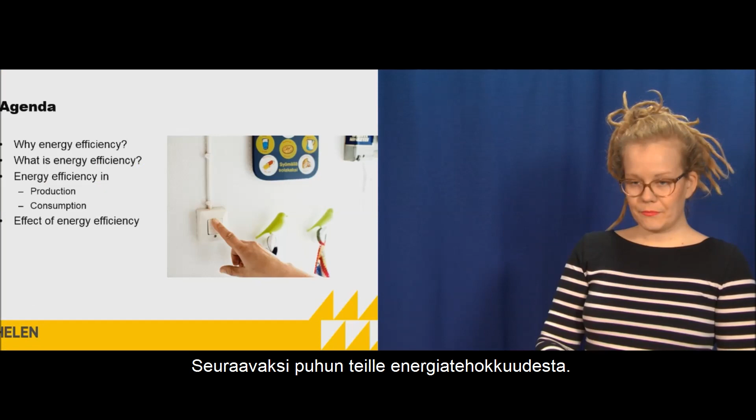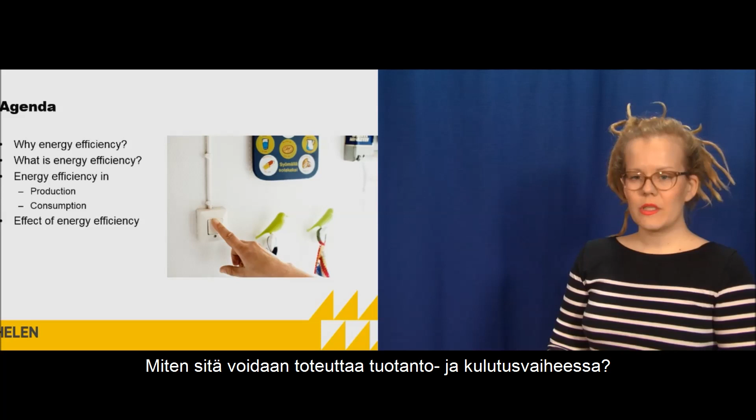So next I'll talk to you about energy efficiency. First, why we should do energy efficiency, then what it is in production and in consumption, and then in the end, what is the effect of energy efficiency.

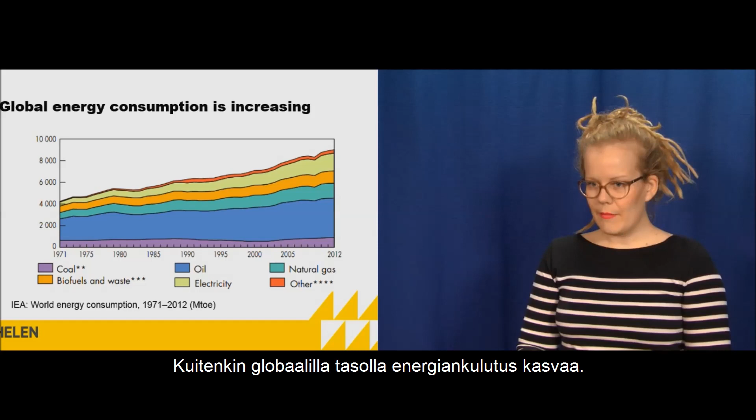So first, why efficient energy use is important. As you already might know, global energy consumption is increasing. And in all countries, it might not be increasing. In Europe, in Western countries, it's decreasing, but on a global level, it's increasing. And mainly, the use of fossil fuels dominates. That means that also global carbon dioxide emissions are increasing.

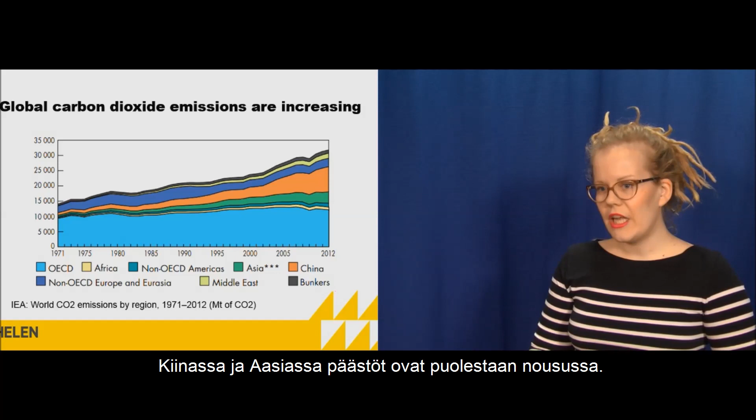And in this picture, you can see the share of different countries, and you see that in OECD countries, the consumption is leveling off. But for example, in China, in Asia, the carbon dioxide emissions are really increasing.

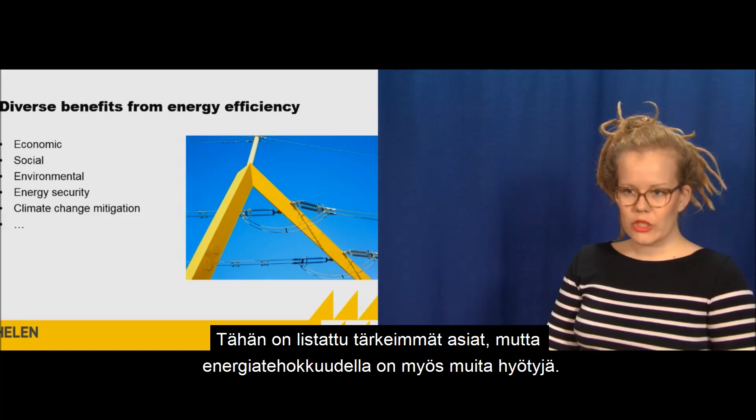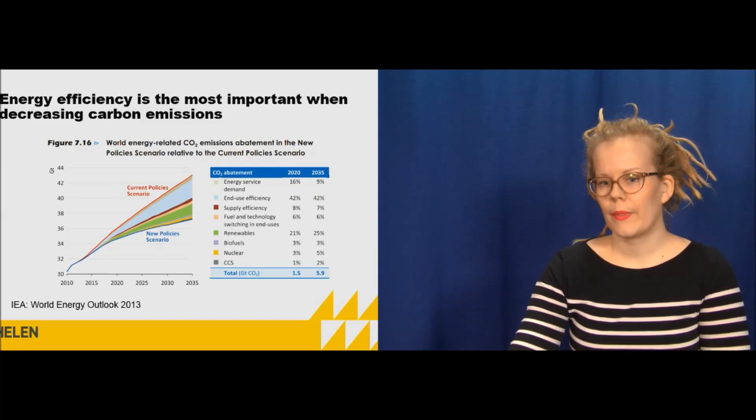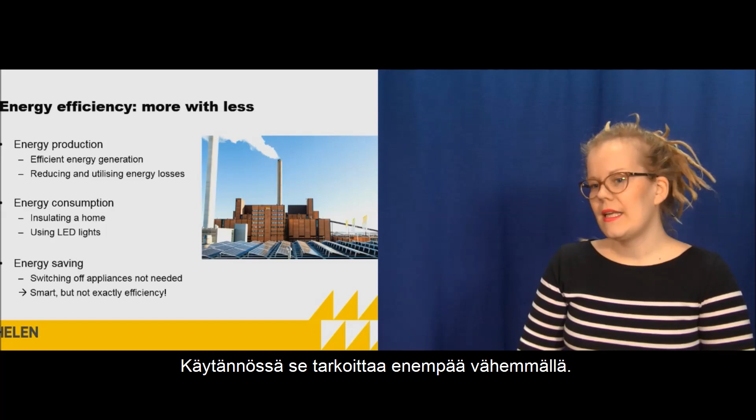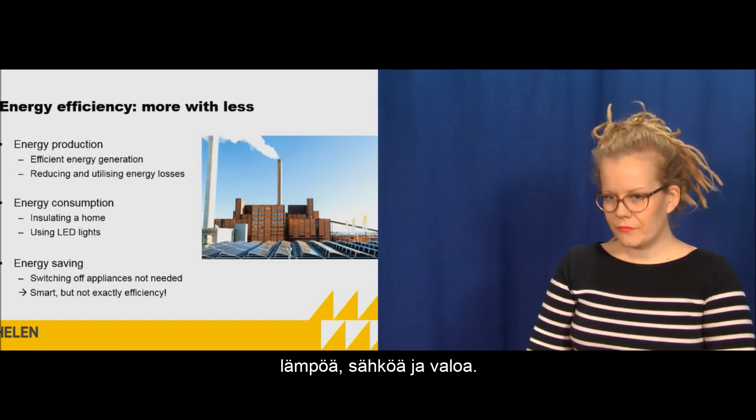Then a little bit about what energy efficiency really is and what it means. Basically, it means more with less. So we can have more services, we can have more heating or more electricity or more light at the house with less primary energy. So in energy production, it basically can mean more efficient energy generation and also reducing and

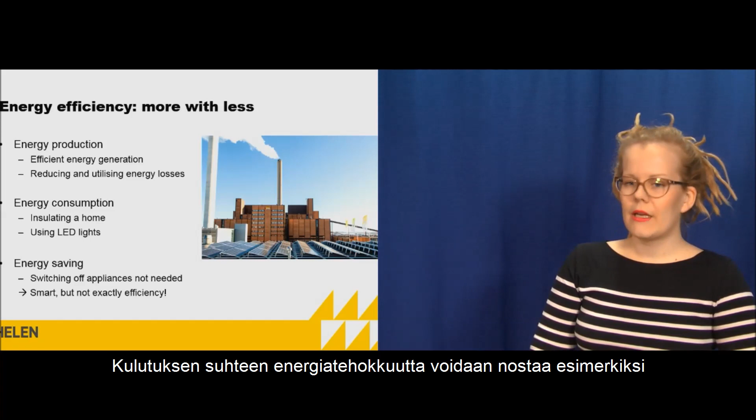utilizing energy losses. On the consumption side, for example, insulating a home so you don't need to heat that much. That's one option, or using LED lights, which consume less energy than traditional ones. Then energy saving is also a way to decrease energy consumption. But I see it as a little bit different than energy efficiency. Of course, you save energy when you switch off appliances that are not needed. It's smart, but it's not exactly efficiency.

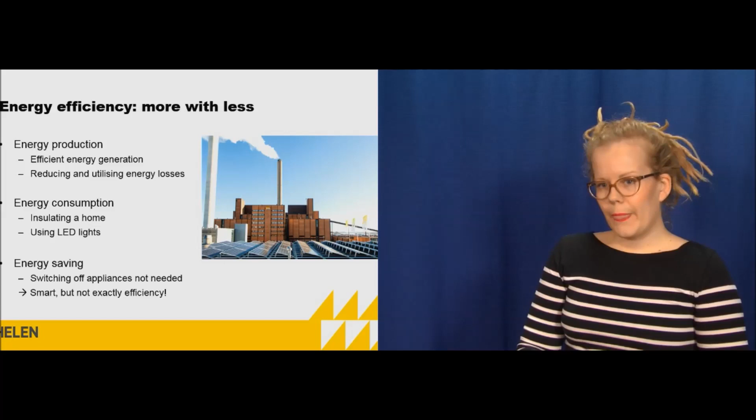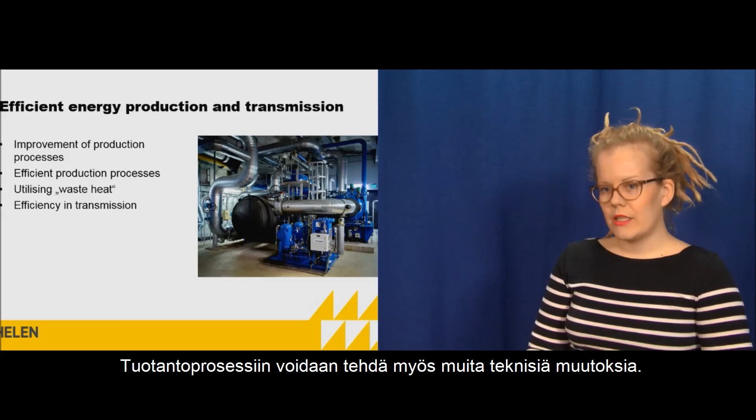Okay, so then we go to efficient energy production. In energy production and transmission, we can improve the efficiency in different ways. We can improve production processes, which can basically mean that we modify the turbines so that they produce more energy from the same amount of fuel, and also do a few more different technical changes to the processes.

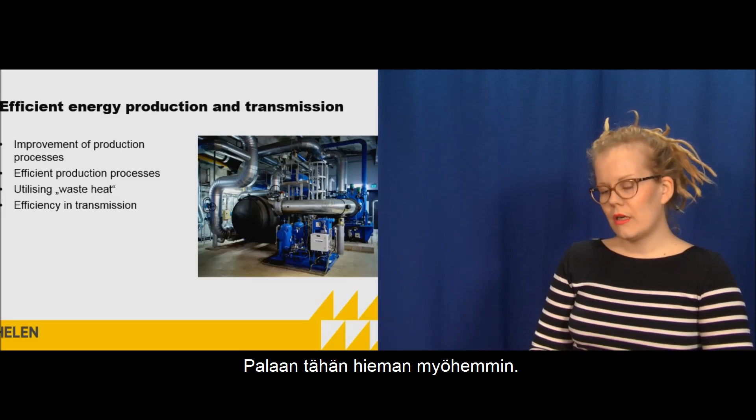Then we can use more efficient production processes, for example, combined heat and power production. I'll come to that a little bit later. Then we can utilize so-called waste heat, and then think about efficiency in transmission, so check that our power lines and heating and cooling transmission networks are efficient and we are not losing energy in them.

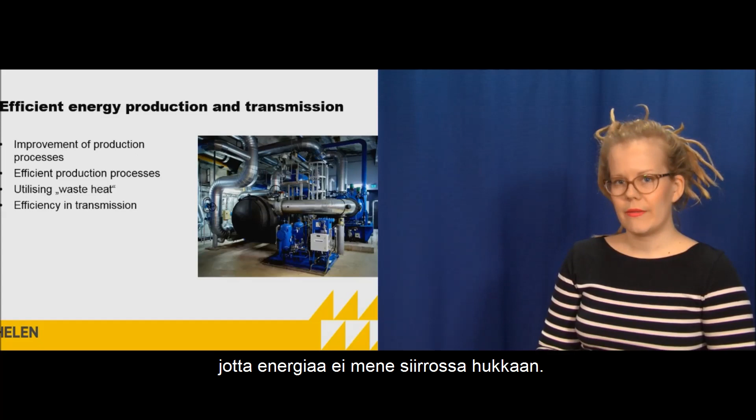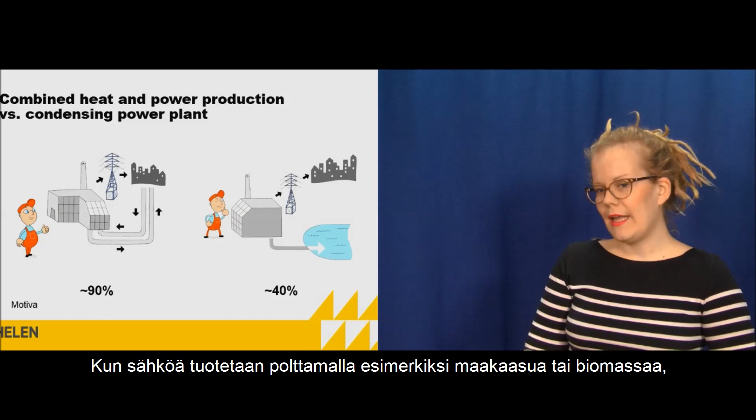So combined heat and power production basically means that when we make energy by burning something, we can burn coal, natural gas, biomass. We use turbines to make electricity. But when we burn something in order to produce electricity, there's always heat in the process. And then we can use the heat to heat up houses and other buildings.

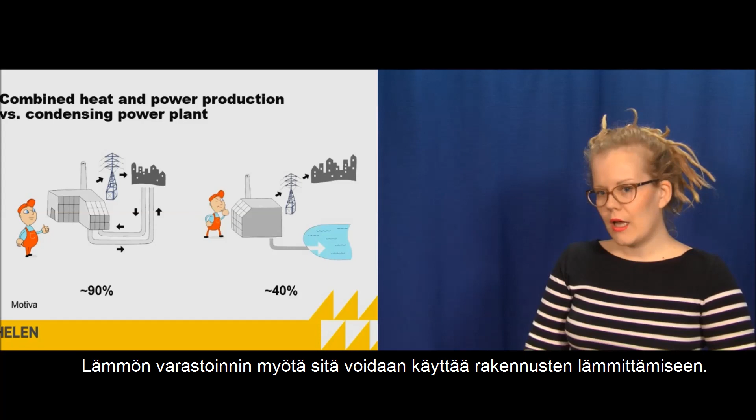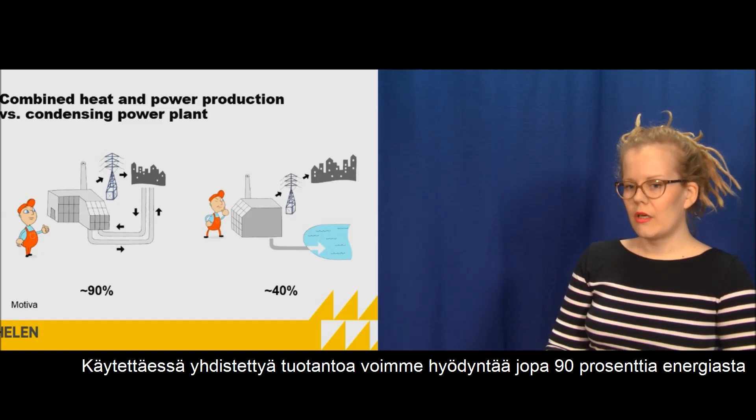So using this combined heat and power production method, we can utilize up to 90% of the energy we are using in the process. So if we get 10 units of natural gas, 9 of it we can transmit to be electricity or heat.

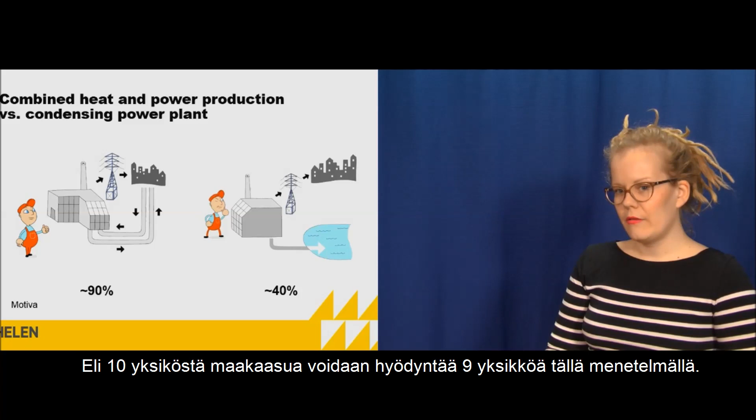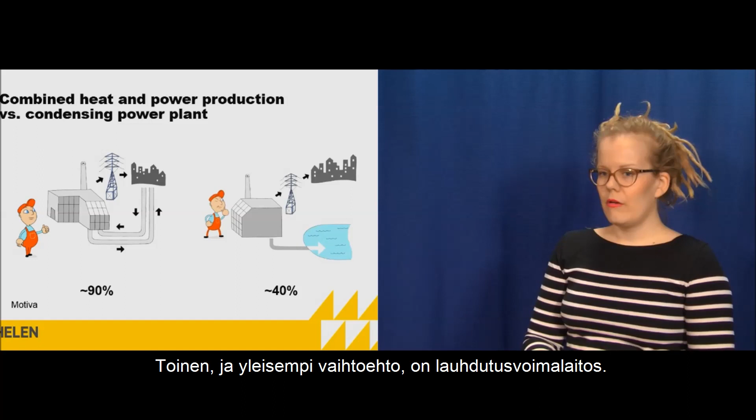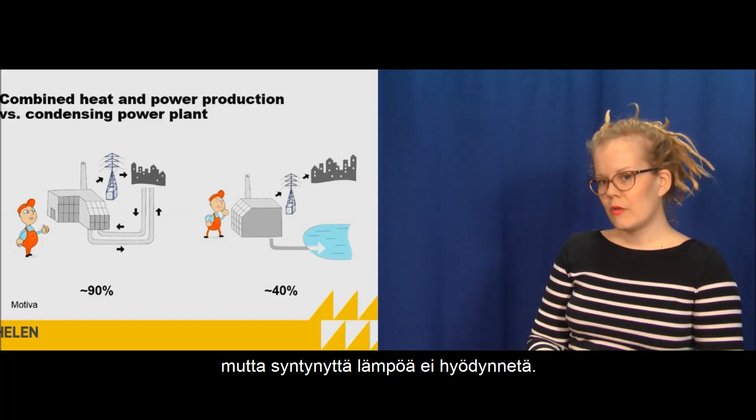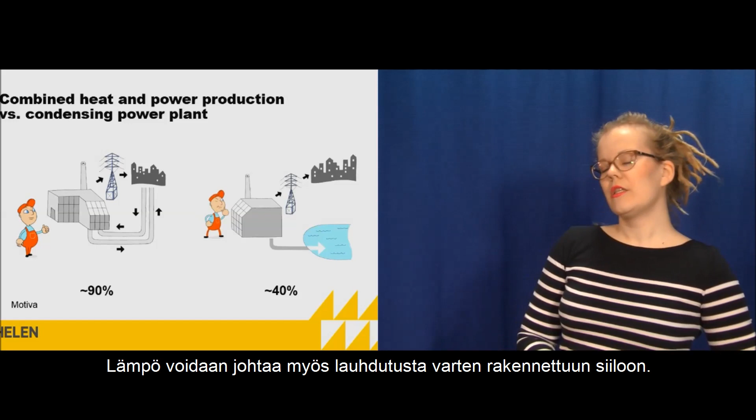Another option, which is more popular, especially in non-Nordic countries, is the condensing power plant, where we produce electricity, but then we don't use the heat. We have to condense it. If the power plant is near water, they condense it to the sea or to the river. And if it's not near water, they use those huge silos, shaped like this, to condense the extra heat to air.

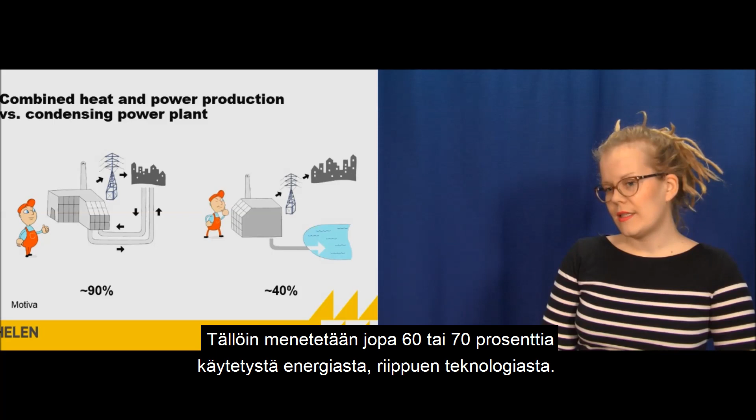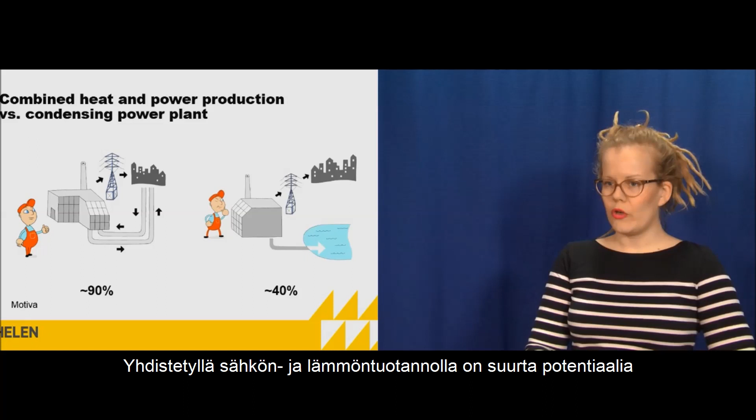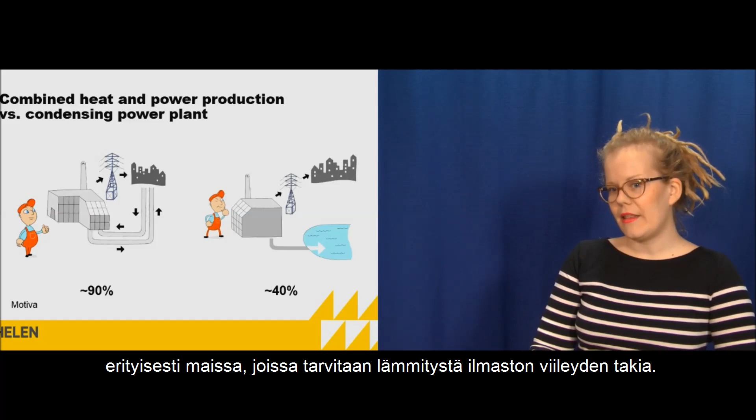And then they lose, depending on the technique and how modern the power plant is, up to 60, even 70% of the energy they are using. So the efficiency rate is only around 40. So combined heat and power production has major potential for increasing the efficiency of energy production. Of course, in some countries you don't need heat that much, but if there's a need for heating, then it's more efficient to use CHP production.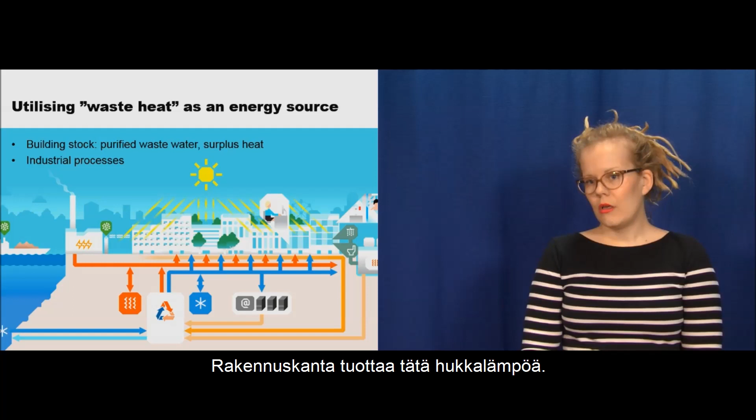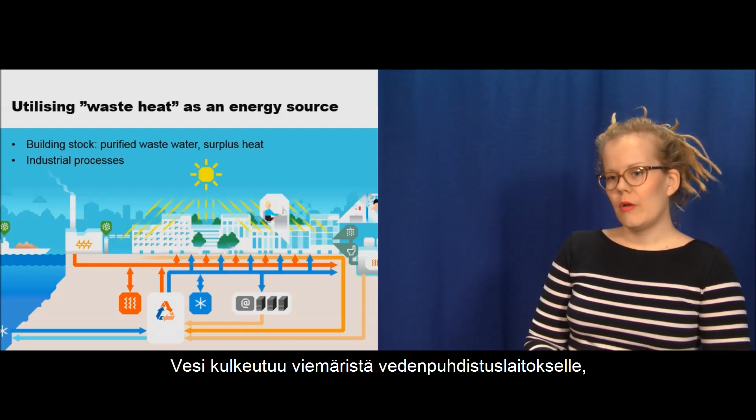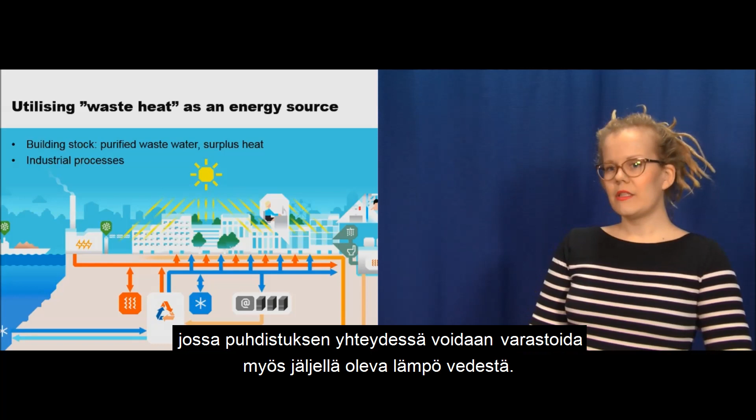Then we can also utilize so-called waste heat as an energy source. We see that building stock can be one energy source. So that means that when you go to shower, you normally use warm water. The water goes to a purifying station, but after the water is purified, it's still quite warm, and after that it continues to the river or sea. And before that, we can utilize the extra heat from the water and use it again to warm houses.

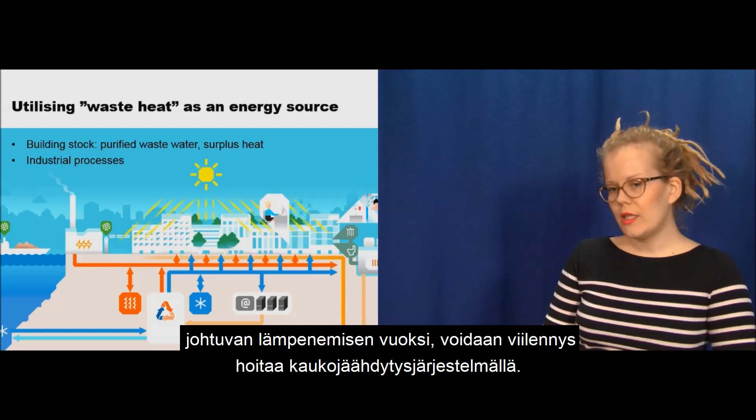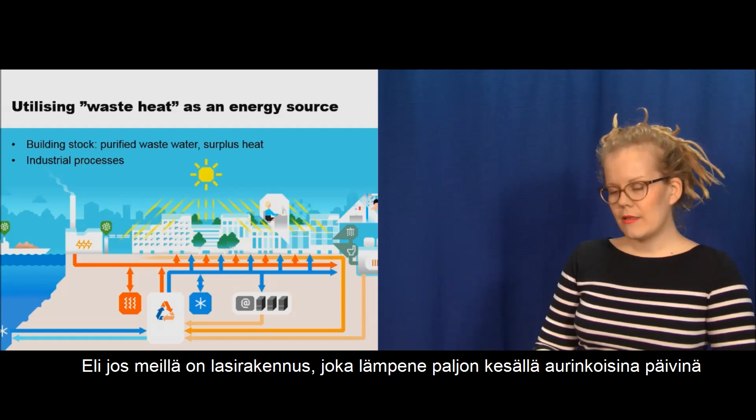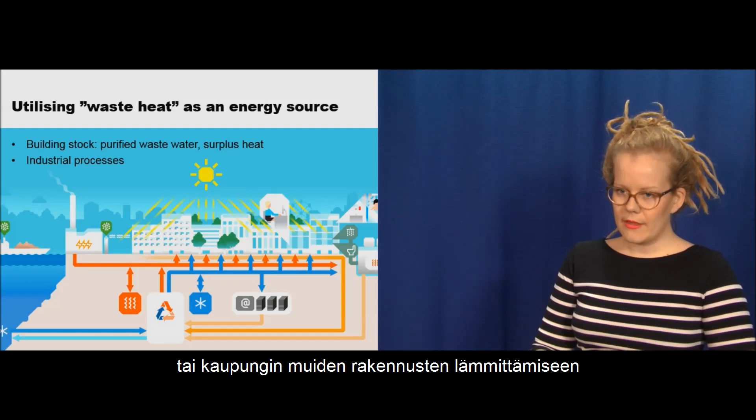Also, if we need to cool buildings, the cooling need comes mainly from the sun, but also people and appliances inside warm the house. We can use district cooling to cool the building, and then utilize the heat we collected from the building to heat other buildings. So if we have a glass building which during sunny summer days warms up quite much, we can take that heat and warm, for example, water in that same house, or warm different houses in the city. Also, we can utilize so-called waste heat from industrial processes to warm up buildings.

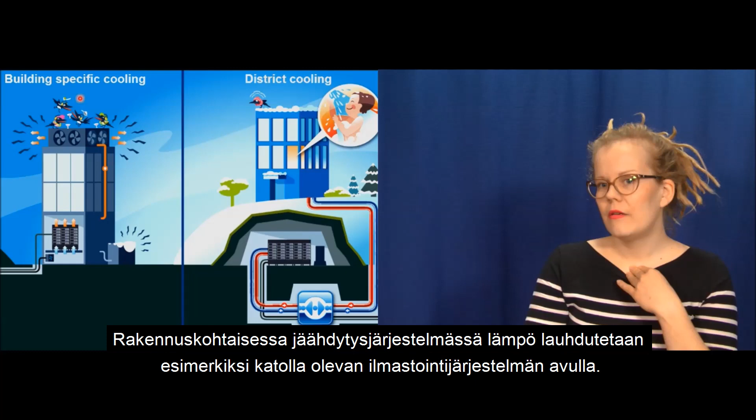This is one example, a little bit about the same phenomenon. So in the left-hand picture, you see there are a lot of computers in a basement. They could also be underground, like in the right-hand picture. And they are using quite a lot of energy, electricity especially, and they are producing a lot of heat. Well, you have to get rid of the heat, and in a building-specific cooling system you have the condensers. You can have them on the roof, and on a cold day you can still blow out air which is 50-60 degrees centigrade warm.

In district cooling solutions, you have the same data center. It could be located in a similar building, and again it uses quite a lot of electricity, but we use cold water to cool it down, and we bring warm water away from the data center. And that warm water we can utilize to heat homes and water. So there's not that much waste heat put outside anymore, and we can utilize the extra heat.

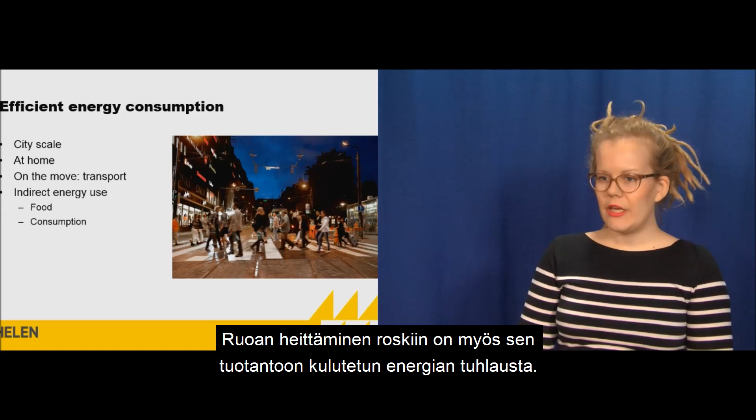Okay, so that was about the production side, and then energy efficiency in consumption. There are different levels at which we can consider energy efficiency. Of course, on a city level, then what happens at your home. Then, of course, transport is one important thing. We are not talking about it that much during this lecture, but transport uses quite a lot of energy, and we can use it in a more efficient way, and we can decrease the transport need. And then there's also indirect energy use. The food you eat, the things you buy, they also use energy at some point of their life cycle. And of course, if you waste a lot of food, at the same time you waste the energy it has used during its whole life cycle. So that's also one point you can consider when thinking about energy efficiency.

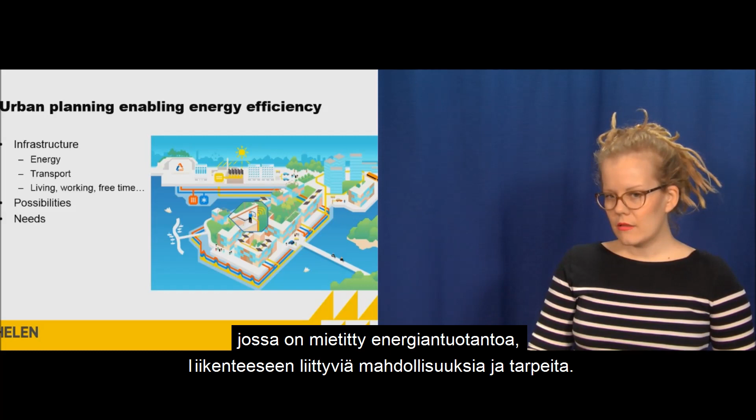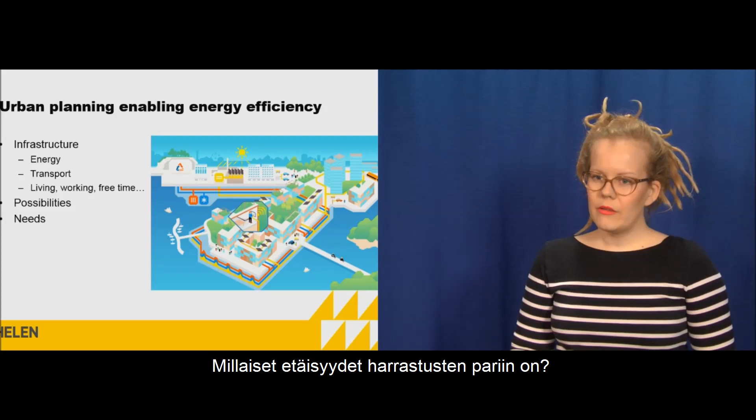Urban planning, if we are living in a city, is a key thing to enable energy efficiency. What kind of infrastructure there is, how the energy production is implemented, what kind of transport opportunities and needs there are. Is everything in the same area, so you don't have to travel that much, or are the living areas far away from office areas, so the transport need is quite high? And how you combine free time. Is there a lot of public transport, which is more energy efficient compared to driving your own car?

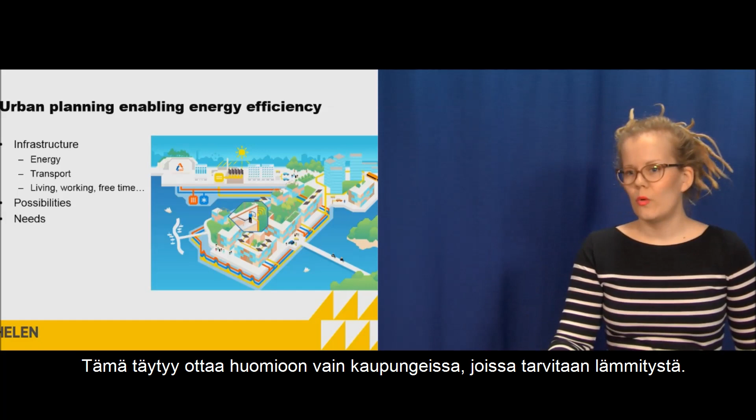So city planning can create a lot of possibilities, and it should take care of the needs we have. For example, in this picture you can see some houses are there just on their own, so during the cold winter they maybe need more heating than this block here, which is more closed, so it doesn't cool down that much. But of course it's different when you don't need to heat houses that much.

Then when we think about energy consumption at home and on an individual level, what you can do, the first thing is to realize how much energy you are consuming and for what you are consuming the energy. On a global scale, we are using a lot of energy for heating and cooling. In the north you are heating and in the south you are cooling, but anyway both of them use quite a lot of energy.

In Finland we use about half of the energy in a home to heating, then 1/5 to warm water, and about 1/3 to electricity. And normally when we talk about energy efficiency and especially energy saving, we talk mainly about electricity. But you have to remember that it's just a small share of the whole part. Of course you can heat your home with electricity, but still the appliances at home, they are playing a small part.

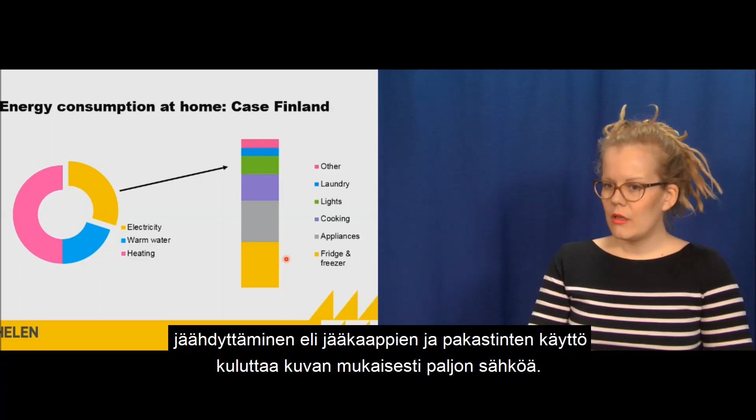And what comes to electricity, here you can see that cooling takes quite a lot of energy. So fridge and freezer, they are in one, and this picture is about one person living in a small apartment. So fridge and freezer, it's quite a big share. Then different kinds of appliances, computer, TV, stereo, and so on. Then cooking, lights, laundry, and other small appliances.

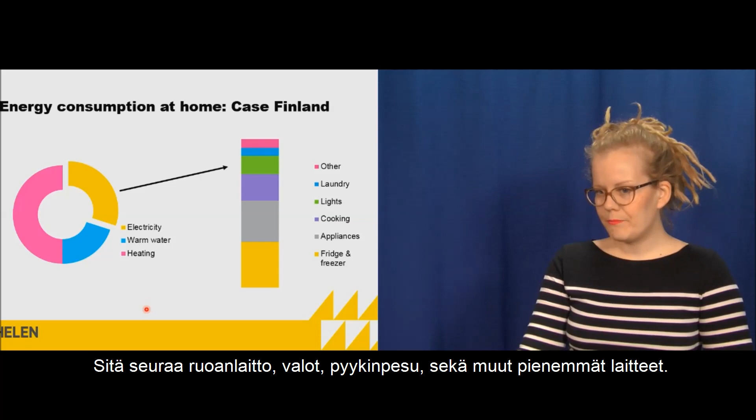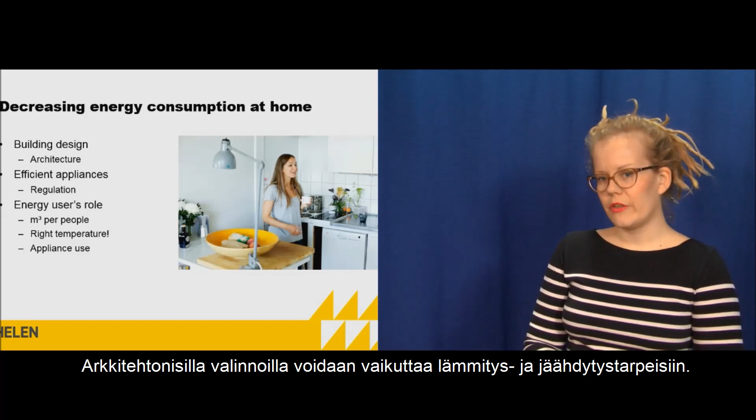So what you can do to decrease energy consumption at home, of course the first thing is building design, how it's planned, architecture, so how much light is coming in, how often you have to use lights, and then of course how much sun warms the house, because you can change quite a lot how much you have to cool the house with different architecture, and also heat.

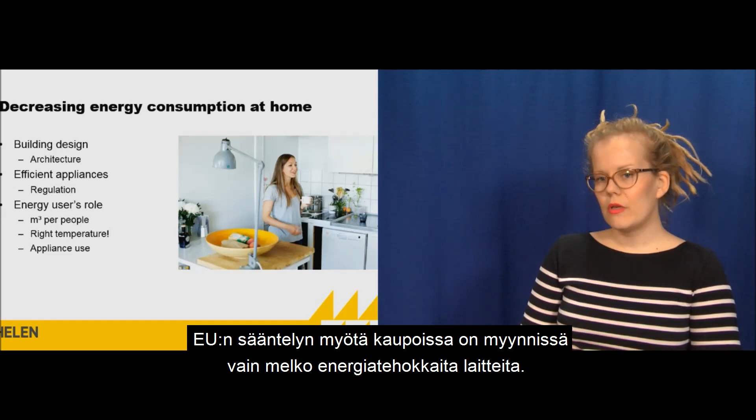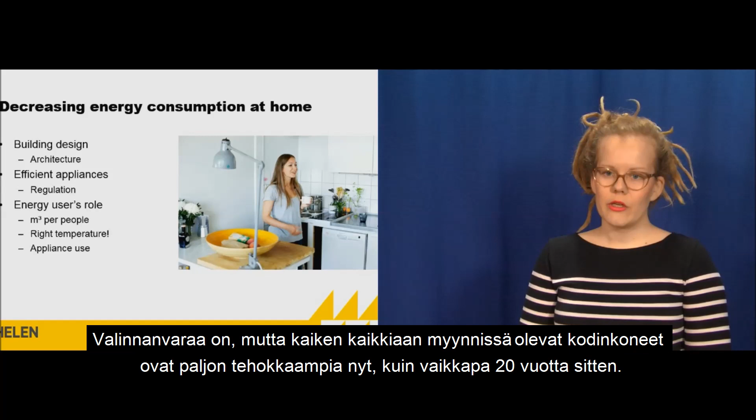Then appliances, how efficient they are, and there's a lot of regulation in the EU considering the appliances. So when you go to a store, you can buy only quite energy efficient appliances. You still have a selection to choose more efficient or less efficient, but compared to 10 or 20 years ago, they are all a lot more efficient than back then.

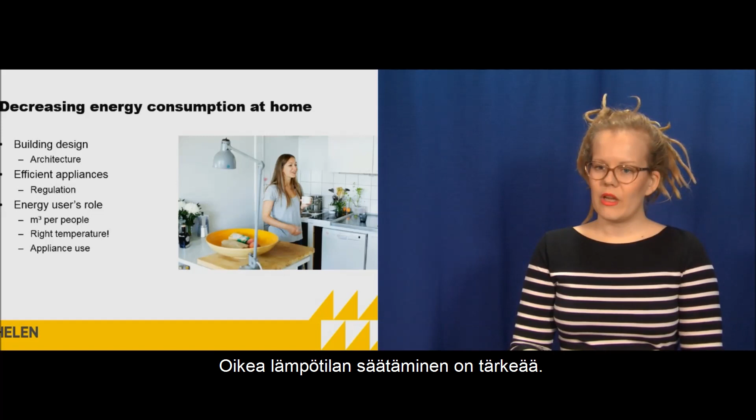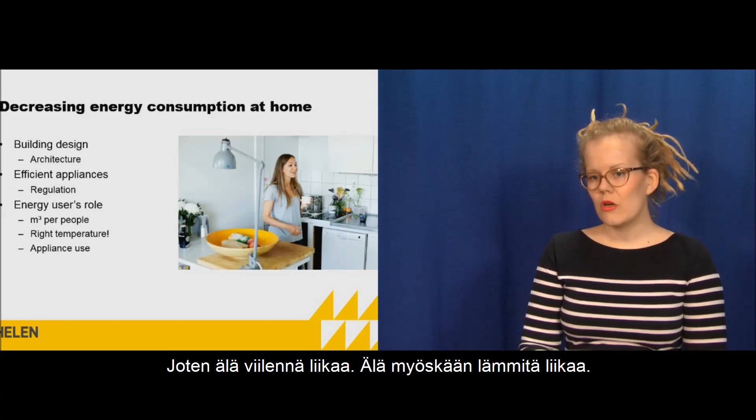And then there's the energy user's role. So how much space you have per person. If you are living one person in 20 square meters compared to one person in 100 square meters, it's a really different thing when it comes to energy consumption. Then the right temperature is crucial. There are different evaluations, but it's around 5% difference in energy use to change the temperature by 1 degree. So don't cool too much, don't heat too much. And then of course appliance use, the energy saving role, switch them off when you're not needing them.

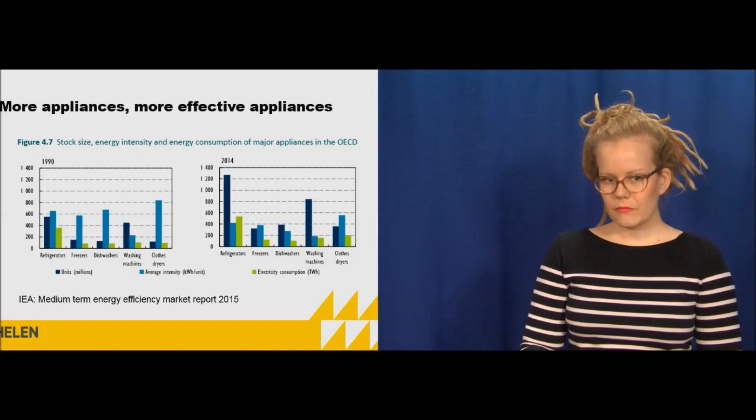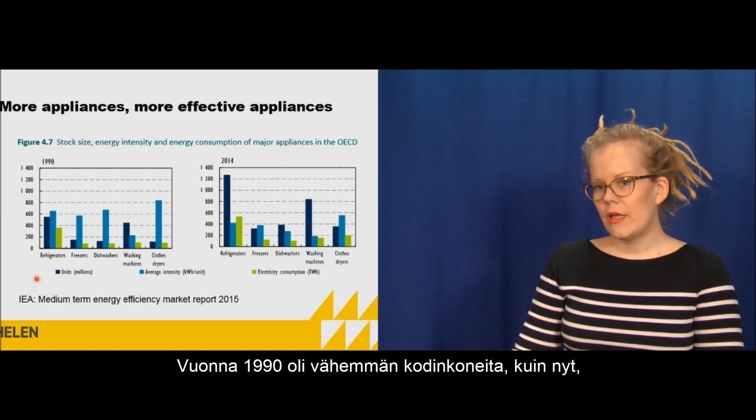This picture shows a little bit how the regulation has affected. So in 1990 there were fewer appliances than there are now, but the electricity consumption, the green one, hasn't increased that much. For example, we have more than double the amount of fridges nowadays, but still the energy consumption has increased maybe only 50%. And this is all because the new appliances are more energy efficient.

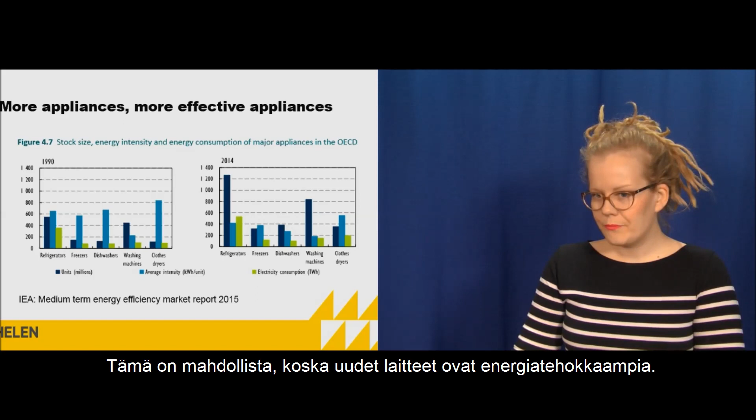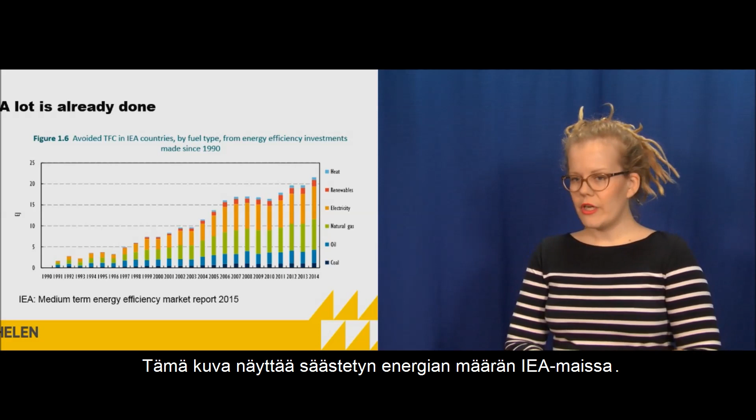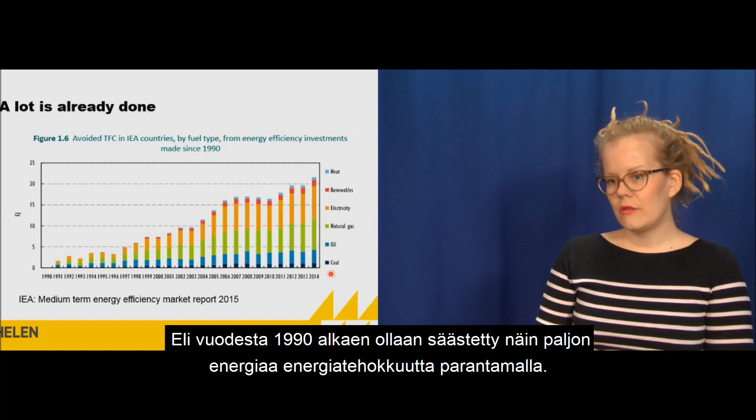Then finally, a little bit about the effect of energy efficiency. A lot is already done. This picture shows the avoided total final consumption in IEA countries. So from 1990, this much energy is saved due to energy efficiency. So over the years, it all has an effect.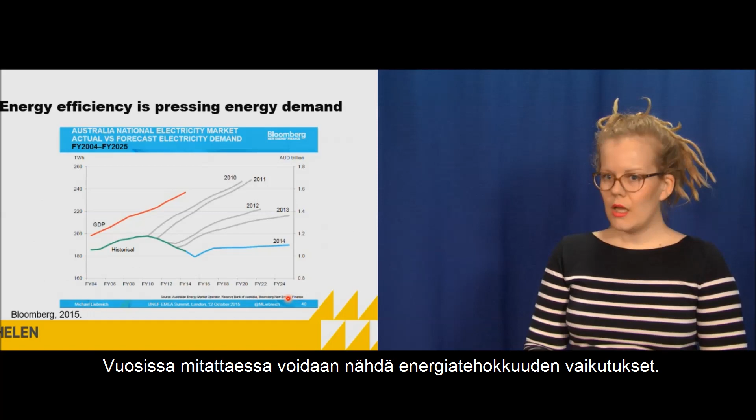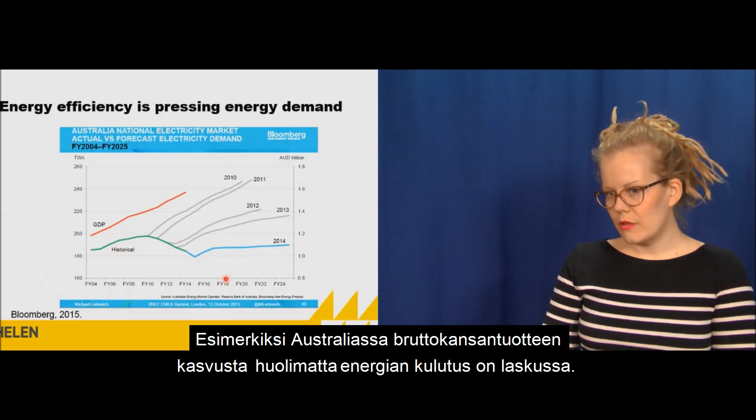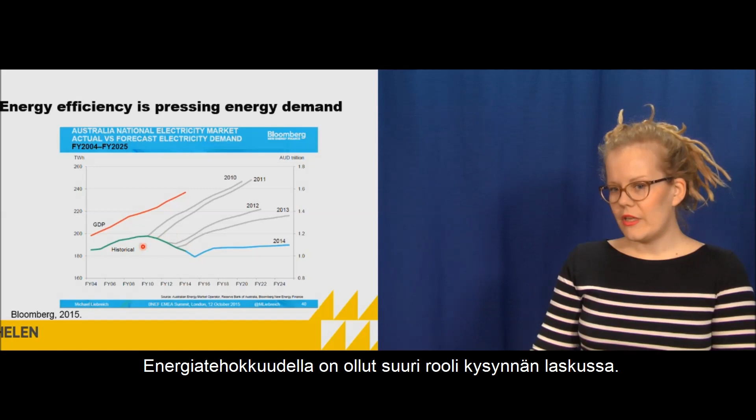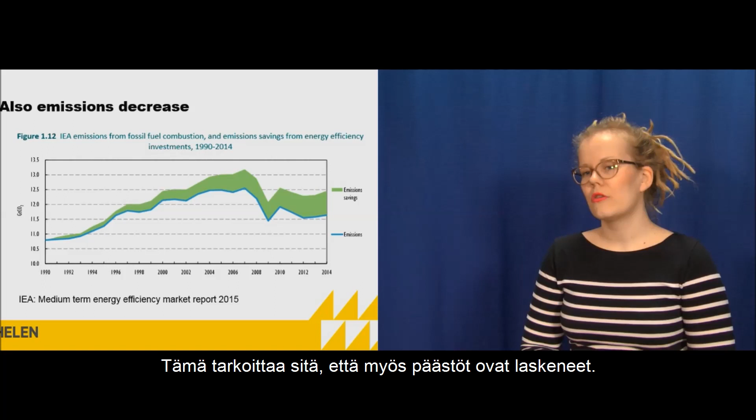And this is an example, as I told in the beginning, that global energy consumption is increasing, but this picture shows that it's not true in every country. For example, in Australia, the GDP has been growing, but still the energy consumption is decreasing. This also shows that the evaluations about the electricity demand haven't been that correct, but it has been decreasing quite a lot, and energy efficiency plays a really big role in this. And what that means is that when we decrease energy consumption, we also decrease emissions, which is really important when we think about the changing climate.

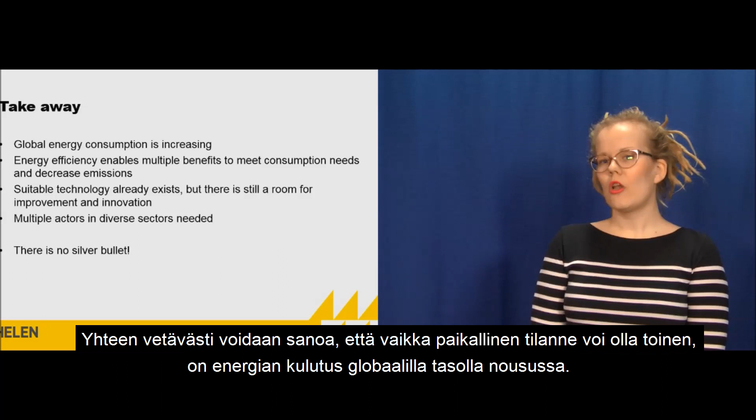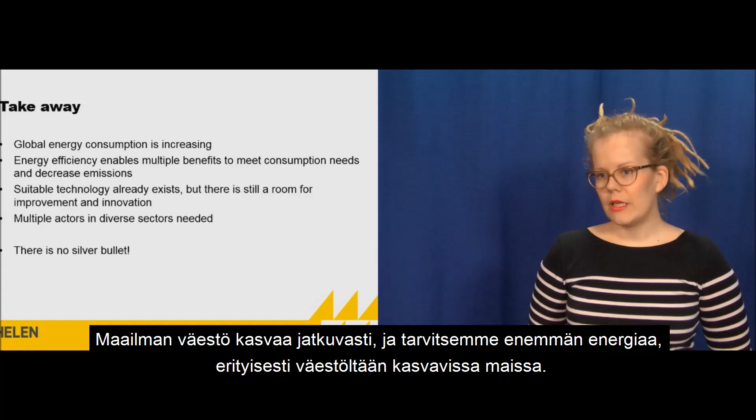Okay, so to summarize, even though the local scale situation might be different, the global energy consumption is increasing, and energy efficiency enables different kinds of benefits to meet the consumption needs and also decrease emissions. The world population is growing, we need more energy, especially in growing countries, so the more efficiently we can use the energy and produce it, the more we have for the consumption needs.

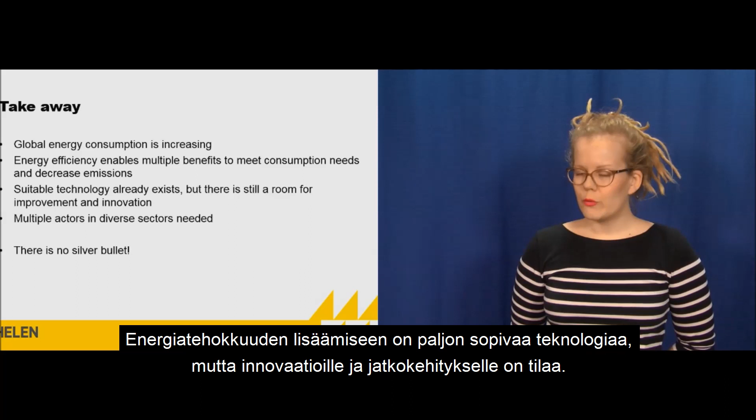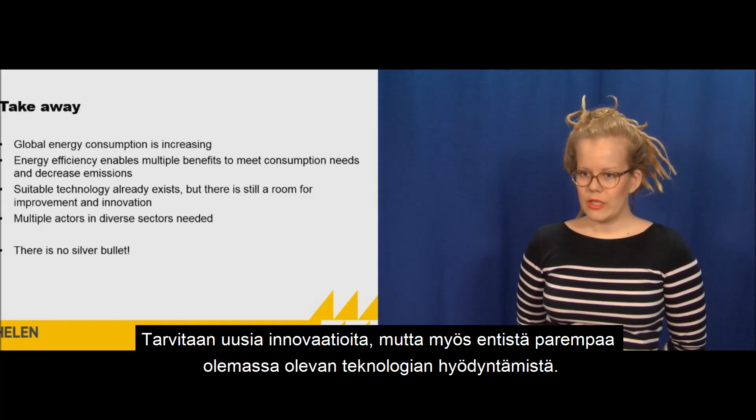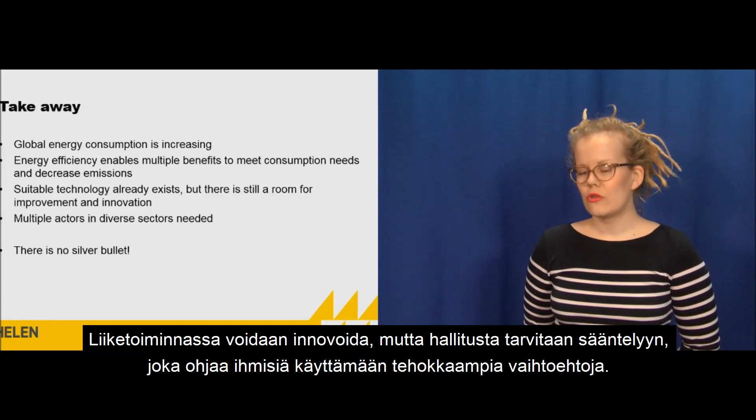There is a lot of suitable technology to increase energy efficiency, but still there's room for improvement and innovation, so we can have new technologies, but we should also find new ways to use the existing technologies. And that means that multiple actors in diverse sectors are needed. So we need business to make the innovation, but we also need government to regulate and help people to use the efficient solutions, and of course individuals have a role in energy efficiency as well.

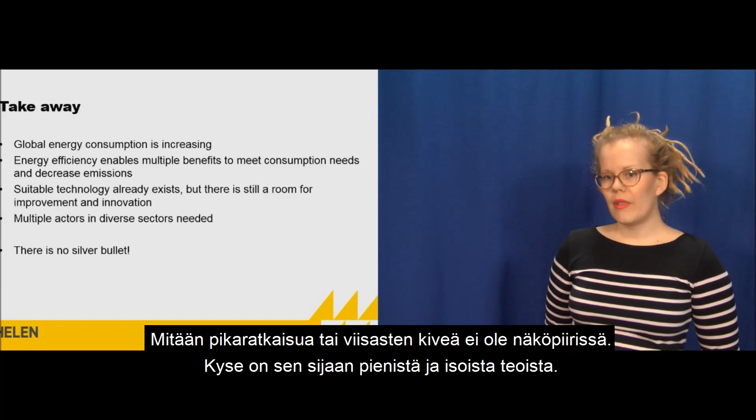And one thing is that there is no silver bullet, so there are a lot of small things and bigger things to do, but there's no one thing we could do which could solve the energy efficiency thing. So it's all about small and big actions on different levels.